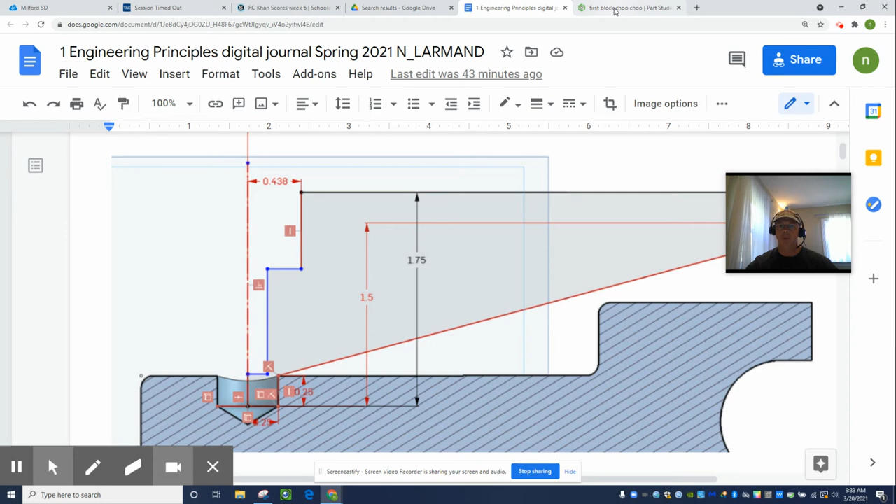Hello, Physics Nation. My name is Nate L'Armond, and this smokestack is giving me fits. For some reason, I keep getting an overconstrained disaster when I do it the way these YouTube tutorials take me through the process. So I'm going to try a different way.

Here is the mechanical drawing, the section view that we're trying to draw in OnShape. I'm going to draw a center line through this thing and then change all of these diameters into widths of the different dimensions. Like this, they give a diameter of 1/2 inch. Well, that means the radius is 1/4 inch. That is the width of this little rectangle on the bottom, 1/4 inch.

Let's get the highlighter. Then, how about this diameter? 1.25. So if you can imagine a center line going through this, that's what I'm going to draw. From that center line to the outside rim would be half of 1 1/4, which is 5/8, or 0.625. We're going to do that for all of the diameters.

So for instance, here, this central hole right there, they say that diameter is 0.375, 3/8. Half of that is 3/16. What is the decimal equivalent of 3/16? That is 0.1875. And then finally, this counterbore diameter they give is 0.875.

So from the center line to there is half of that. What is half of 7/8? 7/16, which is 0.4375. So that's the trick.

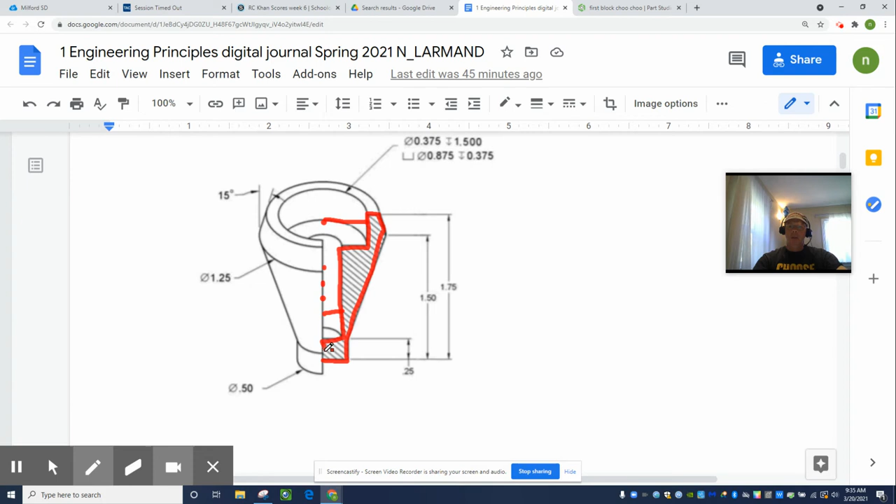The tutorial videos basically take you around the perimeter of this profile, at least the ones I'm watching, and then they try to dimension the profile. And I don't know, it's just an overconstrained, messed up disaster whenever I try to do it in front of students. So I'm going to try a different way.

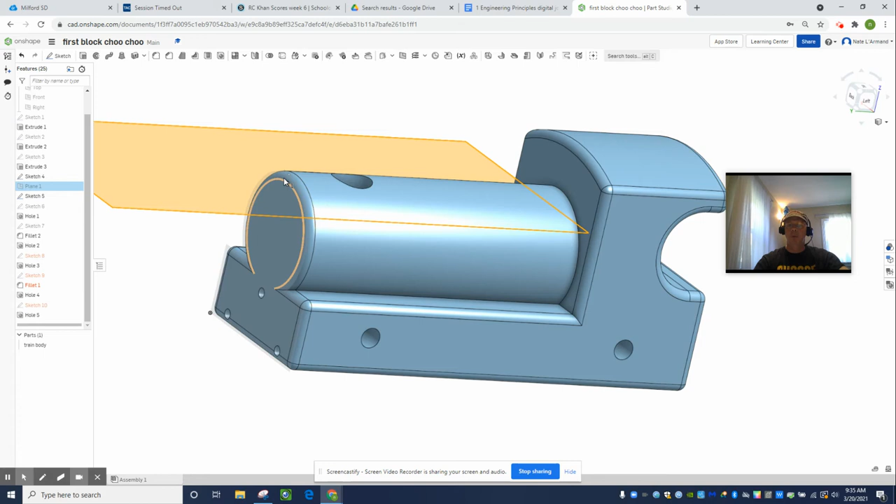So let's actually come to OnShape. Here's my train body. And back, where was it? We drew a work plane. Yeah, so to get this hole drilled into the boiler, we put this transverse work plane on the top, tangent to the boiler, and I forget what sketch it is.

Sketch 4? Yeah, the only component of sketch 4 is that point. So we're actually going to use this point again, except not to draw a plane tangent to the top of the boiler. We're actually going to cut the train into a left half and a right half. I believe the doctors call it a sagittal plane.

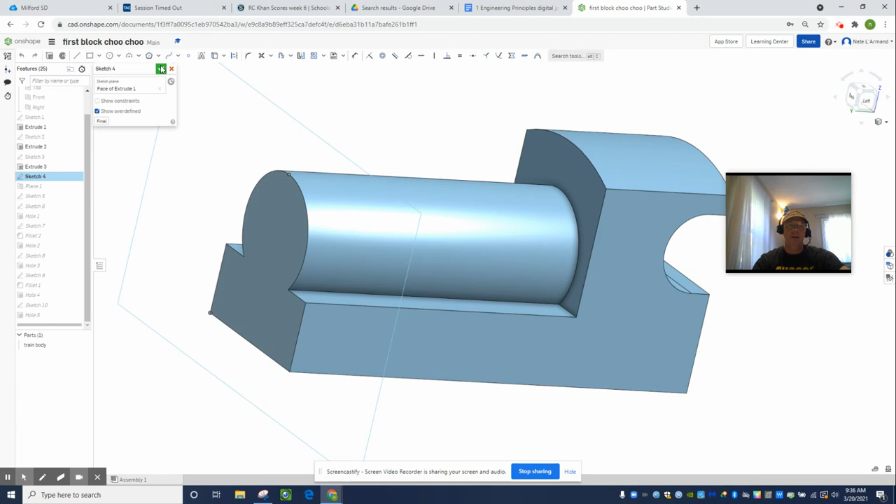So let's try that. Let's get out of this sketch. And where's the plane tool? Let me zoom in. Control plus is zoom in. Whoops, nope, I can't make the tools bigger for some reason. Where is my plane tool?

Right there. Except we don't want an offset plane. We want it parallel to some reference plane passing through a point. Like I said, we're trying to chop it left-right. It's called a sagittal plane. So it's going to be parallel to this face, this side, and it's going to pass through that point. So there's our new work plane.

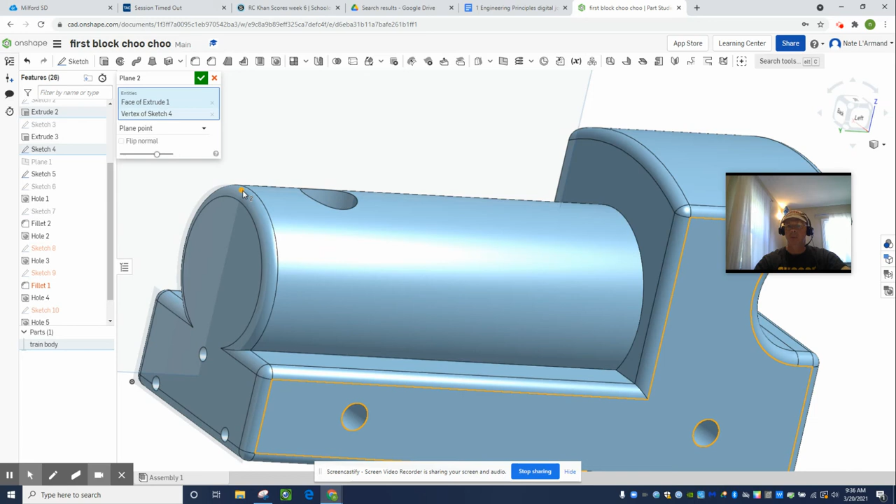We'll just green check that. Let me zoom out just a little bit. Whoops, I spin my wheel to zoom out. I hold the wheel down to pan. I hold right click down to rotate. And so there's our new work plane. We are bisecting this train into a left half and a right half.

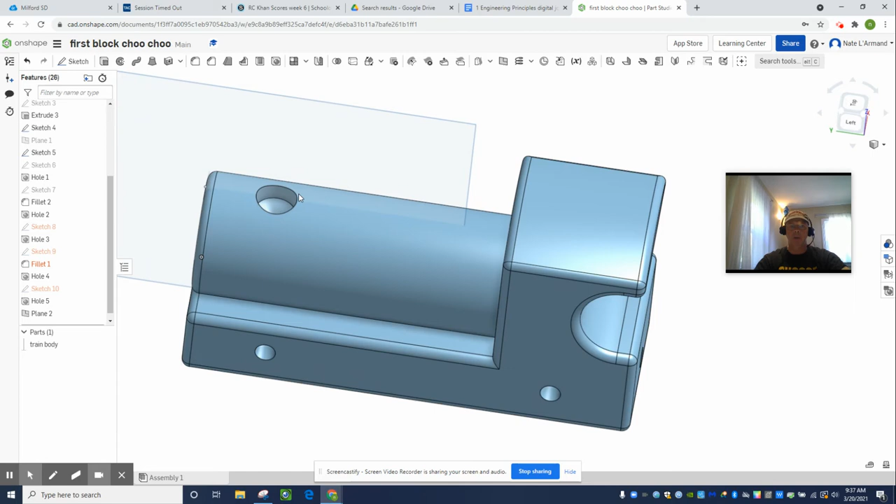All right, and we're going to put our sketch on that work plane. So let's see, we're going to do new sketch. We're going to choose the work plane we just did. I'm going to hit N for normal.

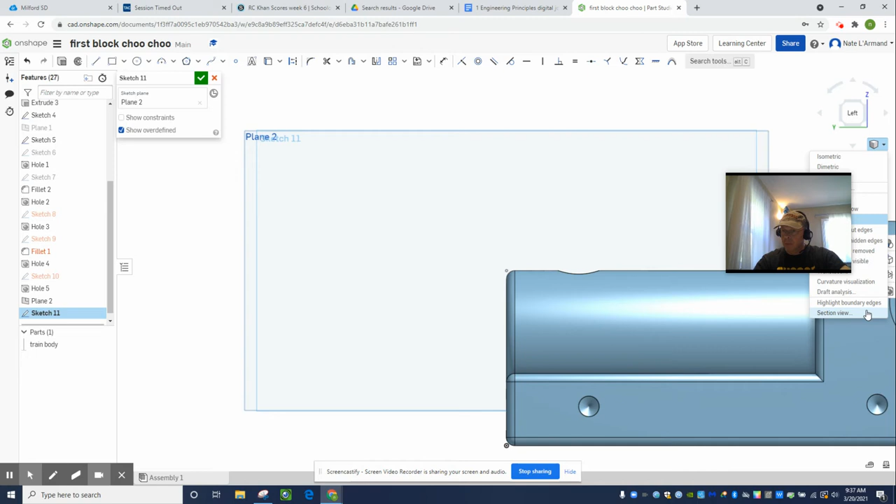I did one of the YouTube tutorial tricks where they say do a section view. It allows you to project the geometry of this hole a little bit easier, and that's what I'm going to do right now. Let's pan this over, hold the wheel down, move your mouse to pan.

Where is the project geometry? Right here, next to the little A. I want to use the bottom line to this hole, the bottom of this rectangle, and I might also want the side wall of this hole.

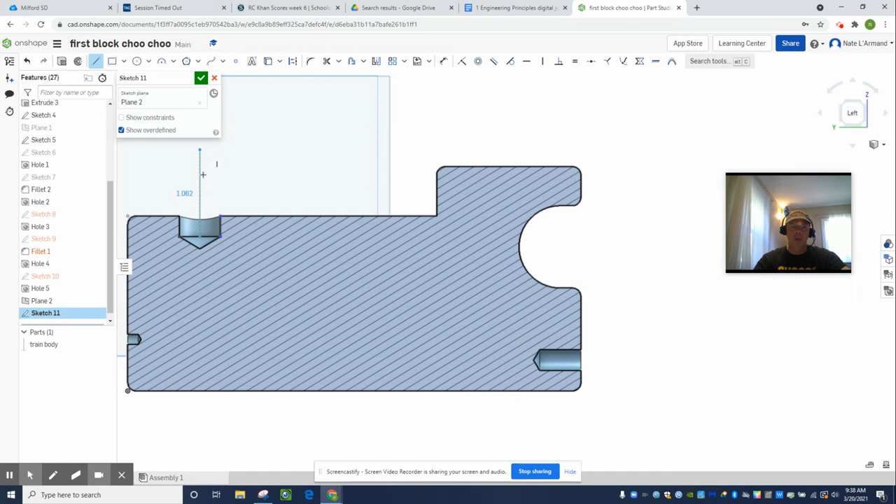So now these two lines exist in this new sketch. And here's my innovation, I'm not sure it's an innovation. All I want to do is do a center line to the revolve function. Let me just pan this down a little bit. Doesn't matter how tall it is.

You could see it automatically put a vertical constraint on that. That's fine. Let me get out of the line tool, hit escape, select that line, and then hit Q to make it a construction line. Or you can select it and hit this little icon up here.

I think this might be a better way of describing all of those diameters. We're actually going to define them as radii, so you just cut those 4 diameters in half and everything is cool. The first diameter was 1/2 an inch down here.

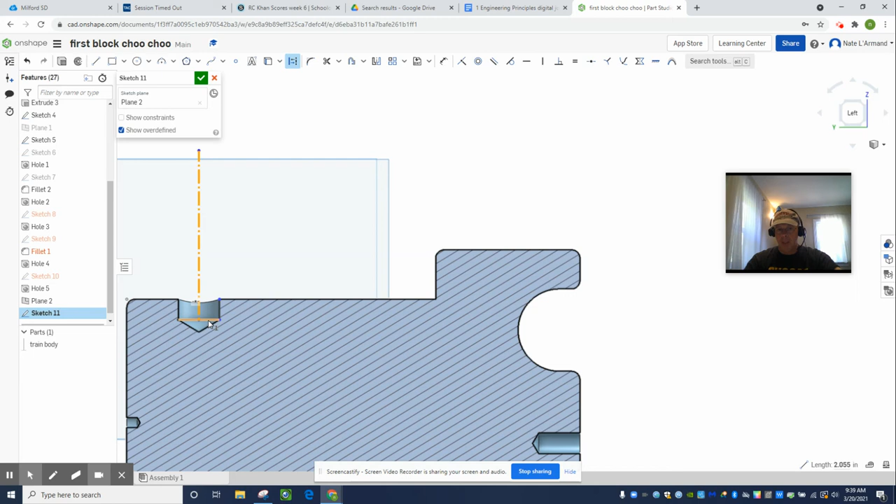That's the width of this little rectangle down here. I guess we can just start drawing the line, just drawing the profile.

So you start the line, end the line. Ooh, is that a construction line? I don't want that to be a construction line, I want that to be an object line. So hang on.

Q? Does Q toggle? Oh mercy, what am I doing? No, I'm drawing a construction line right now. Okay, so let's just stay on the line tool, and then we draw one from the lower right up to that sidewall.

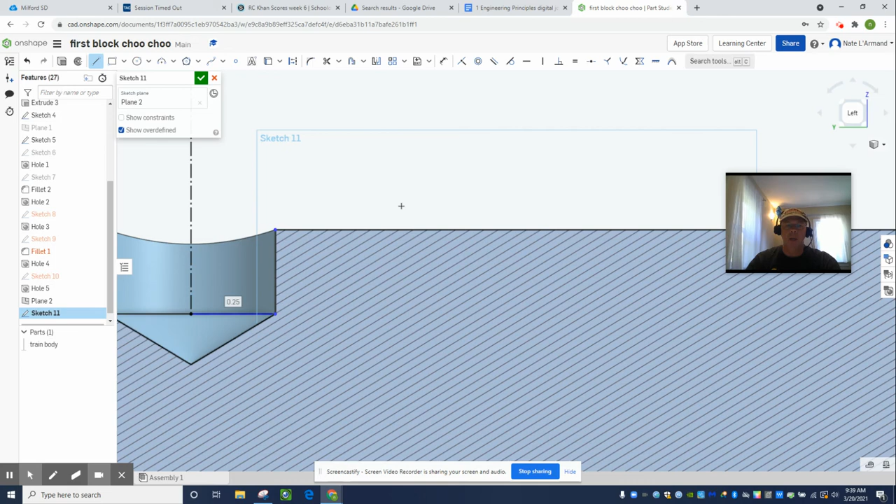I can't tell if that's a construction line or an object line. Let me actually draw an object line on top of it, and it'll change solid. Okay, now it's solid. Right, but it's still blue because we haven't set the dimensions. So let's actually do that.

Let's get out of the line tool, hit the dimensioning tool, choose that line we just drew, and set it to be 1/4 of an inch. The height of this guy is also 1/4 of an inch.

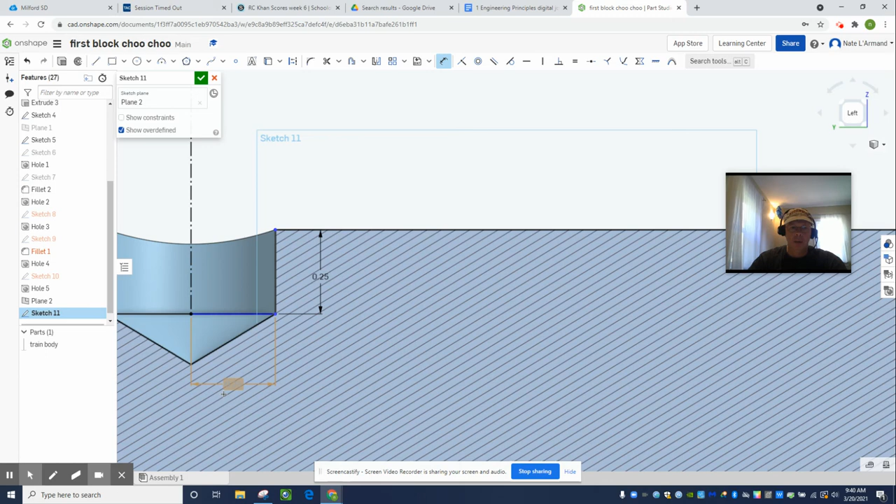Why is this orange and why is this black? I don't know, that's disturbing. All right, so the profile of the revolve just... what just happened? Control Z that. Hit the line tool.

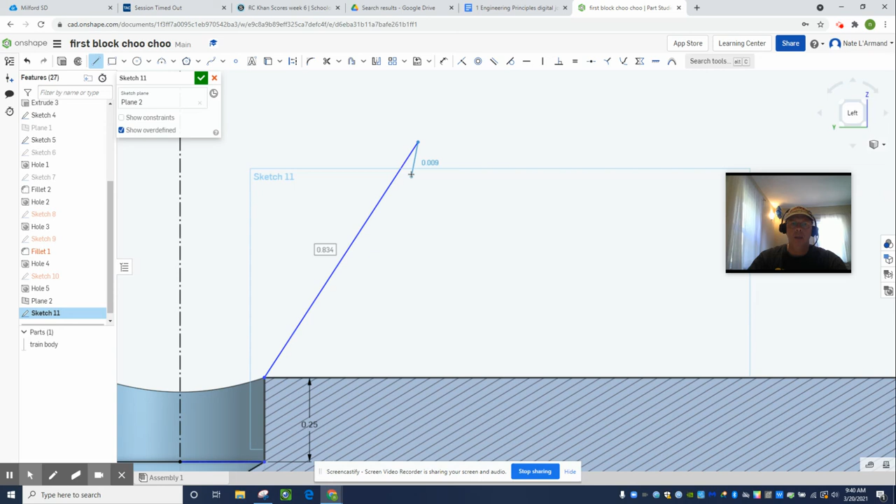The profile moves sort of diagonally like this, and then the smokestack has a little bevel, and then there's a horizontal portion. It's applying a horizontal constraint. You got to watch your automatic geometric constraints. And then we come down, that's the wall of the counter bore, and then...

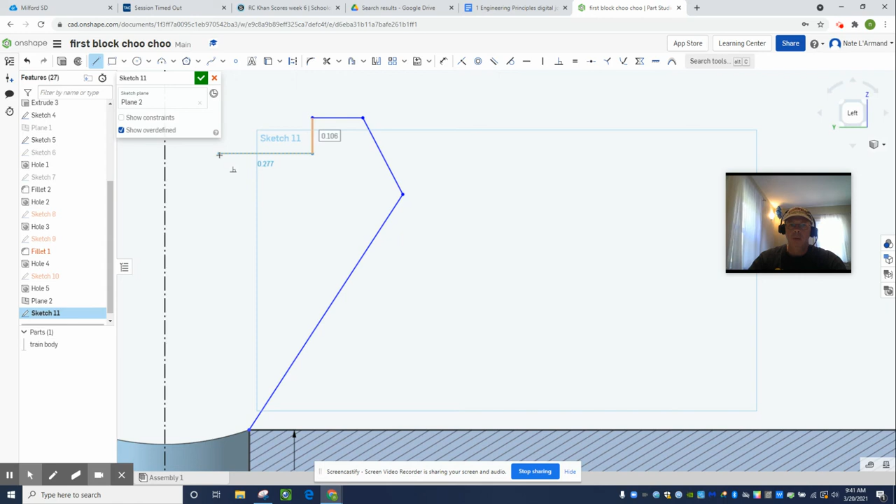It's applying a perpendicular constraint. That's fine. And now this is the wall of the main hole coming down.

I actually do want it to line up with that point I just drew. I don't know if you can see that in the video, but there is a geometric constraint saying the end of this line is going to be horizontal relative to that other point, and that's cool. I actually do want that.

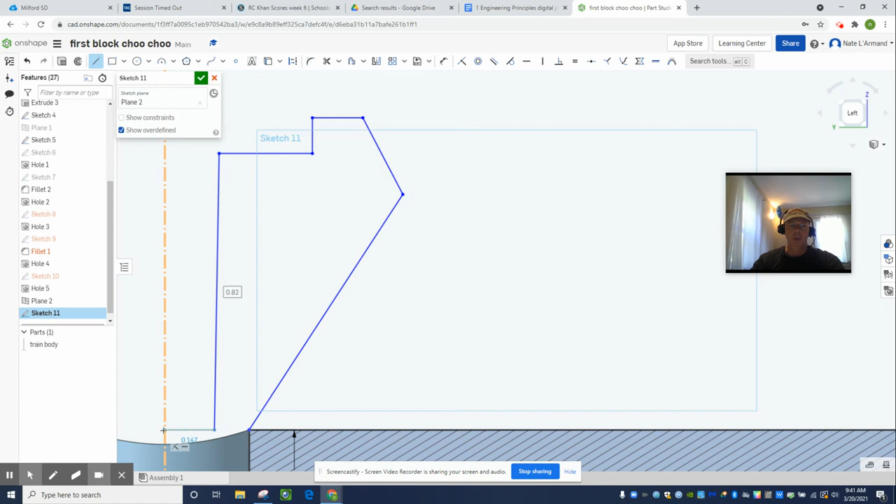And then we come over to the center line. Let's see, I do want it coincident with my center line, and I do want it perpendicular to the last line I drew. So sorry, let's pan up, and now I close my profile. I get out of the line drawing tool by hitting escape, and my profile is all blue.

So now let's put in those diameters. From the center line to the outside of that widest portion of the smokestack is 1/2 the diameter. So we want 1/2 of 1.25, and you can actually put in dimensions like that if you prefer.

So from the center line to the widest portion is 1.25 divided by 2, or 5/8. All right, I'm not a drafting teacher, I don't know where these dimensions should actually go. That's the overall width, that's sort of important, and I think the most important dimensions go furthest on the outside.

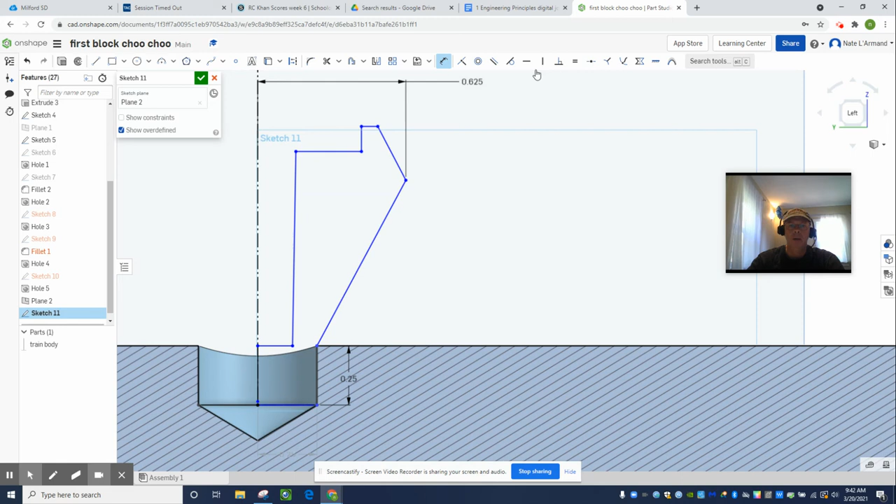So now let's constrain the height of this point right here, they give the height as 1.5. All right, I'm still in the dimensioning tool, so from the bottom of the piece to that point right there, that's 1.5.

It's looking kind of jacked up. That's fine. The overall height of the piece, from top to bottom, is 1.75.

Now, how about the counterbore? We got to cut the diameter in half. They give the counterbore diameter as 0.875. You can put formulas into OnShape, so this is 0.875 divided by 2. All right, that's fine.

Let's do our last diameter from the center line to the... oh, that does not appear to be vertical. All right, forget dimensioning that. This line has to be vertical, so let's apply a vertical constraint to it. Yep, that's better. Now we can dimension it.

From the center line to this wall is, what was it, half of 3/8? We're going to cut 0.375 in 2. So 0.375 divided by 2 is the radius, and there it is. All right, so I think...

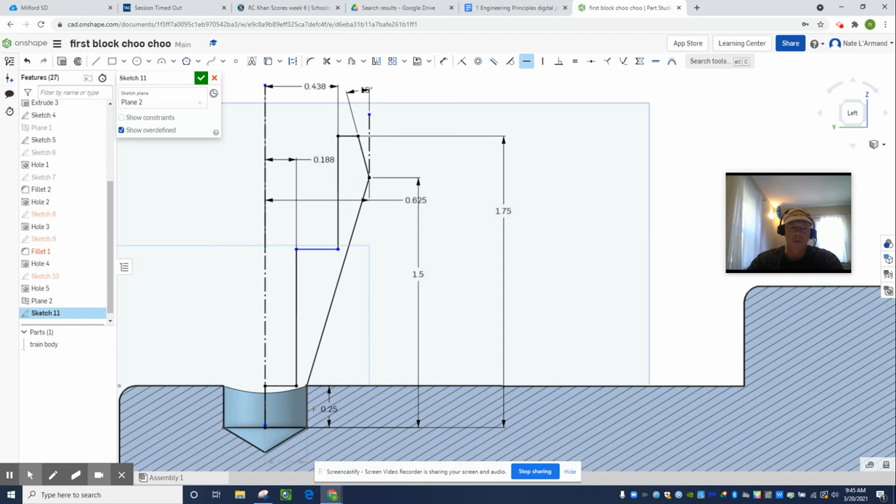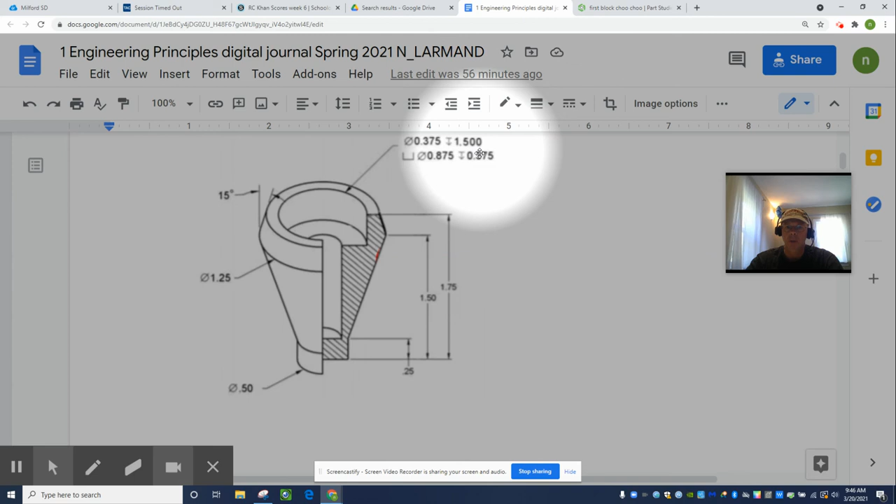Okay, so yeah, I don't know. What's my last constraint that I need to apply? No, hang on, how can I change the geometry of this thing? Oh, okay, so that's the depth of the counterbore. And what is the depth of the counterbore? 0.375. Okay, so let's do our dimensioning tool from the top of the smokestack to the bottom of the counterbore, is 3/8. 3 divided by 8 is 0.375.

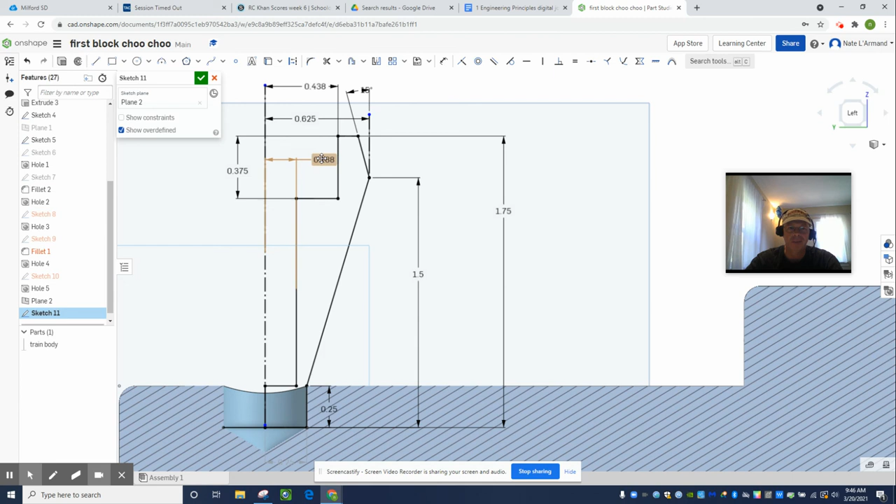And voila, it's totally black. The sketch is done. Hang on. So the dimensions are all over the place—I'm not a drafting teacher, I have no idea what's appropriate here. Anyway, everything's black, so that's what I like to see. Fully constrained. We're going to finish this sketch.

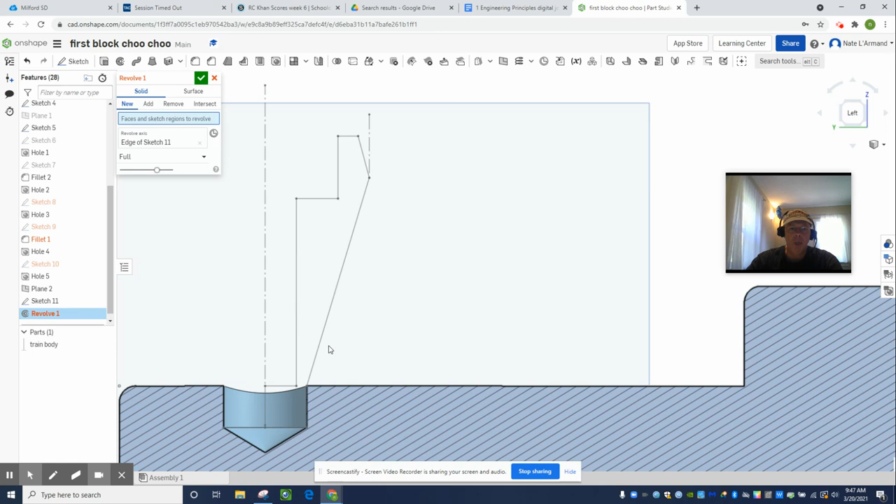Here's the magic. You come to the 3D modeling tools, hit revolve. It's asking what area you'd like to revolve. Why isn't this selecting? Is this not? Oh man, what is going on? That's the axis. Yeah, why? Is my region not closed? Like, whoa. I thought I marched all around my perimeter. Maybe I didn't. Oh boy.

Okay, so I can't revolve this. Hang on, let's go back to the sketch. Why is this random point? Oh, this isn't a closed area, so I don't know what's going on here. All right, so hang on. Let's actually chop this line—I think I just trimmed it. And let's draw another line. I think maybe I don't know what this is. All right, so let's go from the bottom to there.

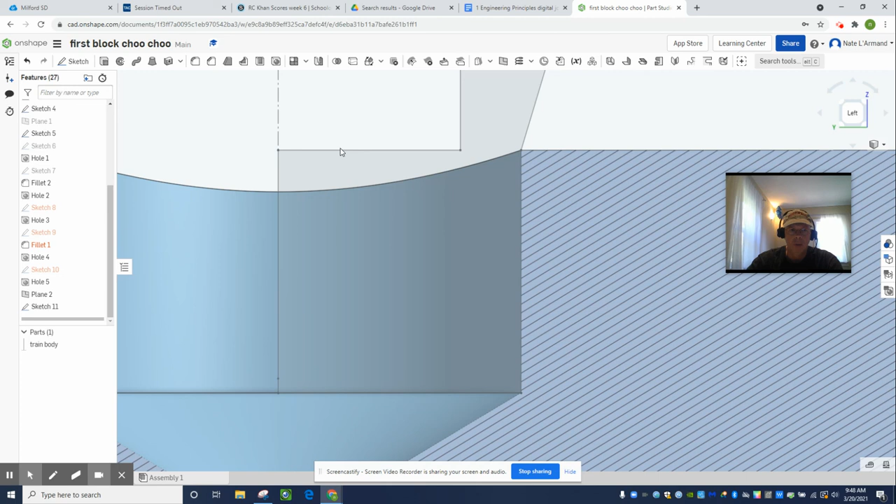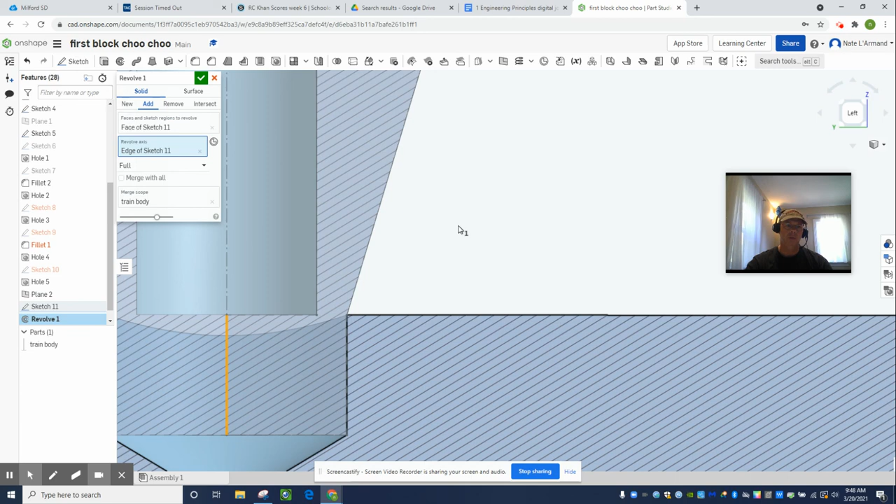All right, so that took way too long. I'm still captain of the struggle bus, but I think we're getting closer. Thanks for watching, see you in the next video.